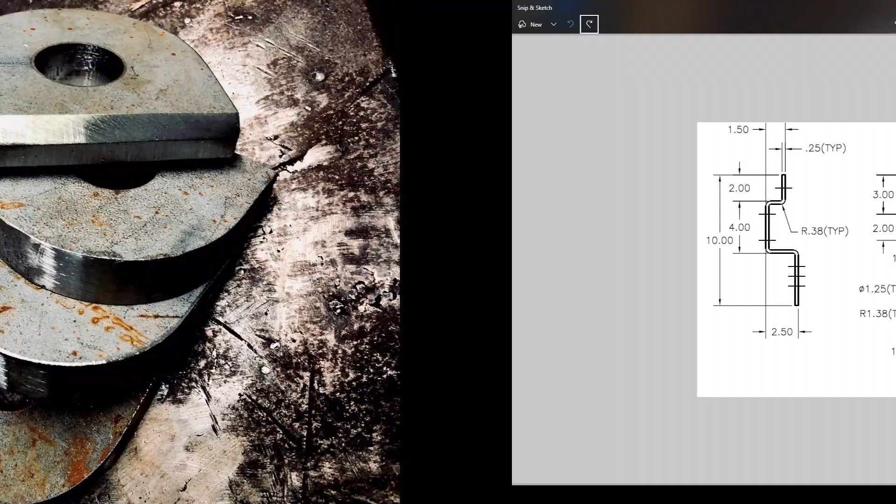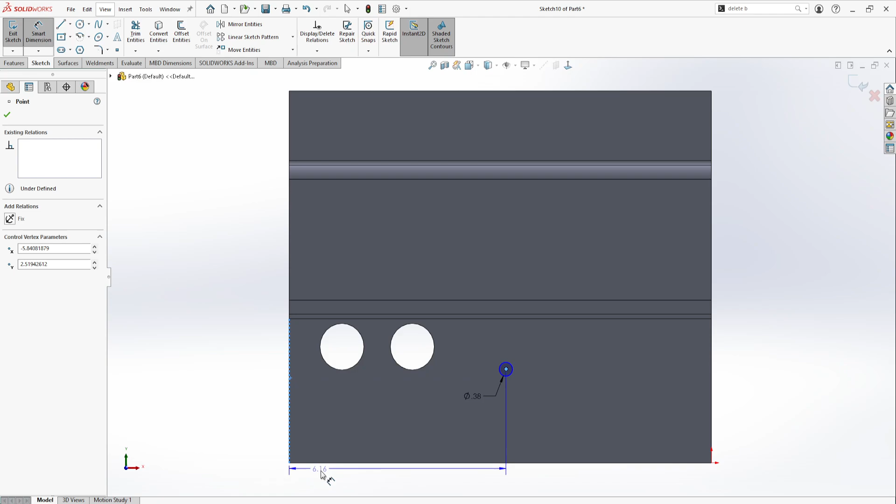But we need a diameter, which is located here, 0.38, so 0.375. In non-computer world, let's see, so let's add a circle, dimension that to 0.375. You can also do 3 divided by 8 to get 3/8. Let's grab a dimension from center to outside, 5.5. And then that one is 1.25, also in line with these holes.

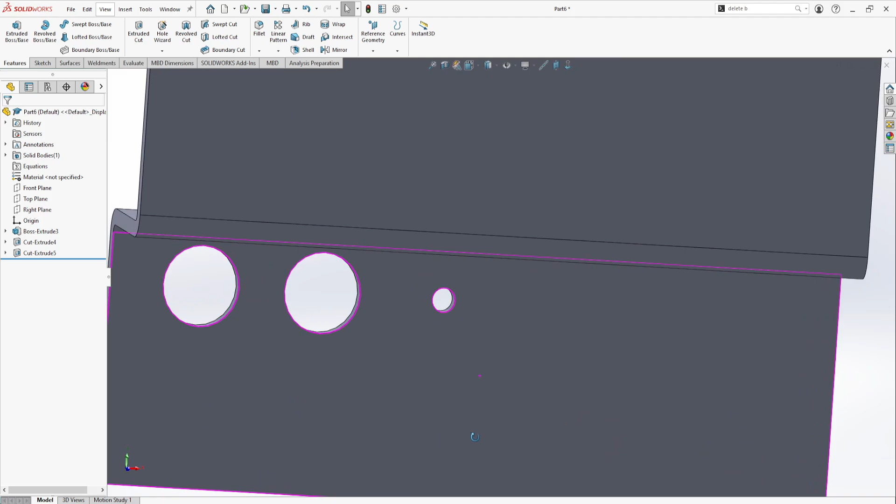Feature, extrude cut, up to next. Hit your check. Okay. Now we have that. Now we need to pattern that hole. You can pattern it in the sketch. Generally, I like to do a single feature, such as this hole, and separate that from my linear pattern. That makes it easier to change the linear pattern and the size of the actual feature individually, and also helps you see what's happening.

Generally, I like to keep the tree as small as possible, but that's one instance where I like to separate the single feature and the linear pattern. So for our linear pattern, we can see that we're going to go this way by 1.13, so that's 1 inch and 1/8. Going this way, and we're going to have 5 instances.

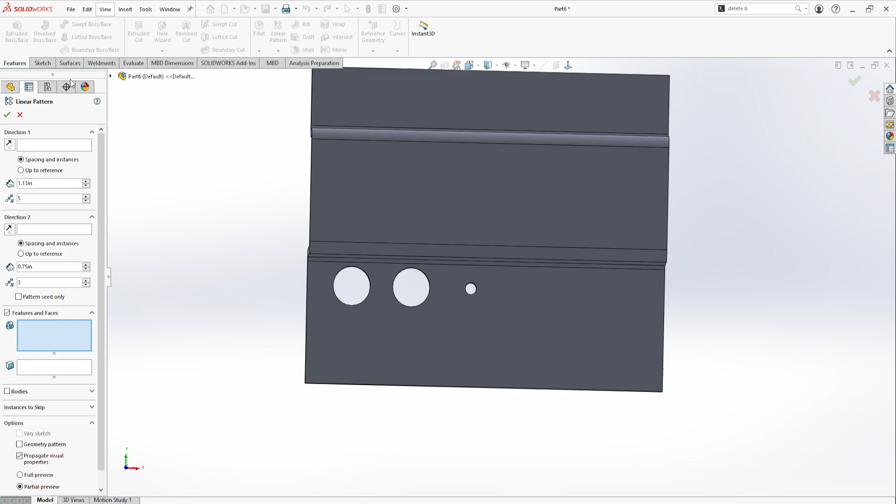So when we do linear pattern, under features and faces, this one's faces, this one's features, we can grab our tree from this top arrow here, click our cut extrude, we can pick a direction. Let's actually do a little closer. Let's pick, oops, go away, normal to. There we go. Let's pick that. Don't want the face. There we are. And we can see the direction is going the right way. We can flip the directions with this button here.

We can either do up to a reference or spacing and instances. So in this case, we want our 1.125 for our spacing. Even though it says 1.13, what we're really going after is 1 and 1/8. So decimal equivalent is 1.125. Let's flip that back to a correct direction. We can see this is how we change the number.

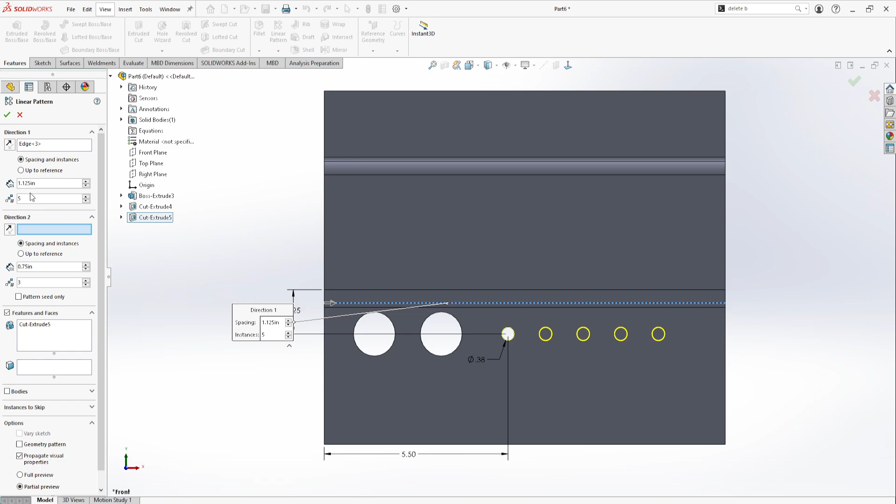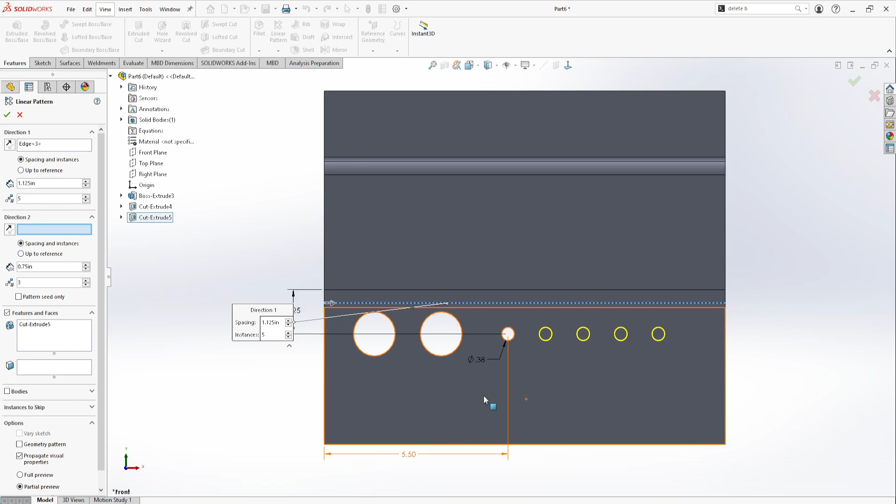So we want 5 holes, or not 5 copies, but 5 total locations of our feature. You can see that I selected 5, but there's still 5 total. So this does not equal the number of copies. This equals the copies plus the original. And in the same feature, you can do a second direction. Pick this line. And this is already in there since I already built the part.

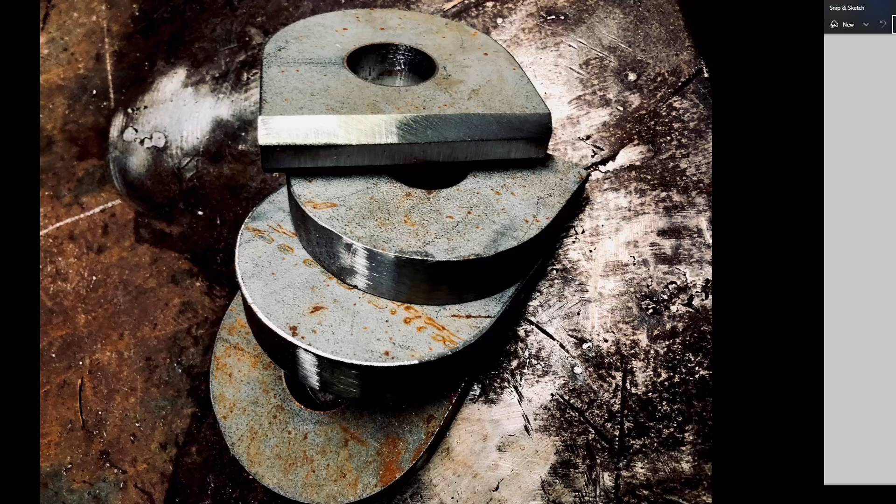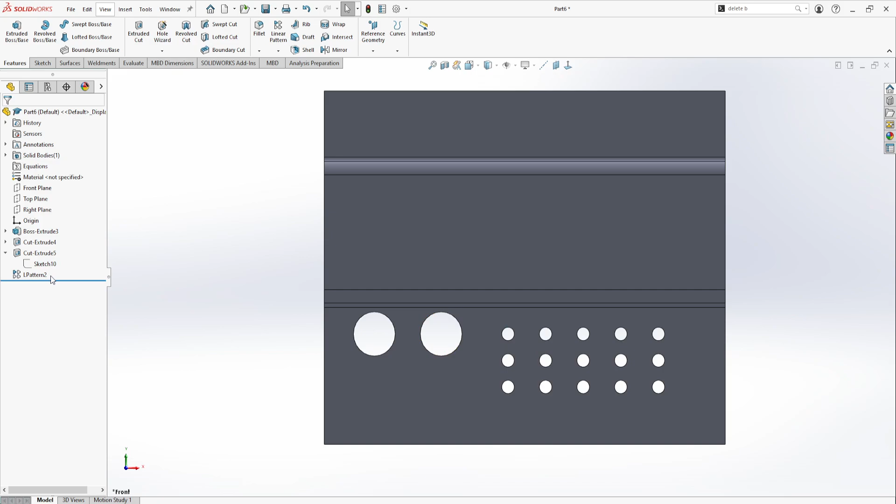So now we have our single hole that we could go in and edit at any time. We could go and change the location of our grid or the diameter of the hole very easily. Or we could go in and change our grid here.